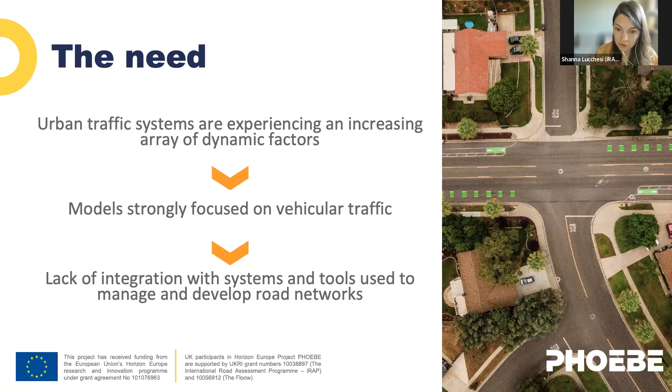So we understand that there is this lack of integration of all of these tools. Basically what we are trying to provide here is a framework that connects and enhances simulations to, again, assess the impact of interventions. But we are very ambitious with this project. We are trying to look not only at the individual level, so how users are behaving for this intervention, but at the impact network-wide, so at the macro level. And we want the framework to be able to assess the impact of new forms of transport, new technologies, or any regulatory and behavioral change. And again, with focus on vulnerable road users, not only vehicle occupants. We also aim that the PHOEBE framework will be a kind of blueprint. So we are not developing a tool properly, but it's basically a way to do these assessments. We are testing this methodology with several tools that you will see in a minute.

But the idea is here that this could be replicable with different softwares, with different methodologies. What we are trying here is really create the path on how can we do these more holistic assessments. So the project objectives, very quickly, is to develop this new replicable methodology for dynamic safety prediction and socioeconomic evaluations.

For this, we had to do some type of harmonization of safety definitions between risk assessments and traffic simulation models. We want to enhance and integrate urban risk assessment models and tools and embody the social components into risk assessment and traffic simulation, especially human behavior and mode and trip choice.

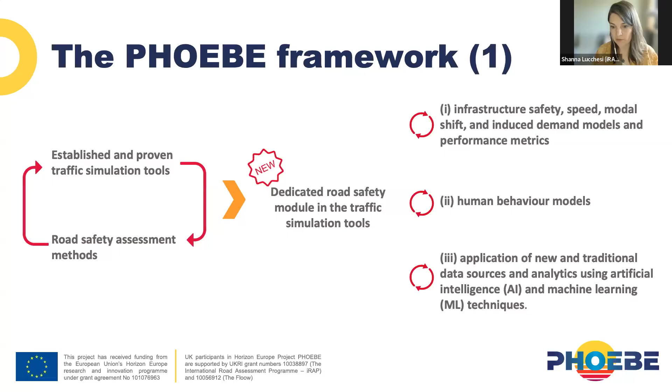So we are enhancing simulations with human behavior models that will do a more proper way of simulating behaviors inside of these tools. And also with the modal shift and induced demand model. So basically how these interventions are also changing the way that people travel and how they are inducing new travels as well. And all of this, of course, with the idea of getting new and innovative data sources, especially using AI and machine learning techniques.

So the project starts developing methodologically how the simulations can be enhanced. I know this can be quite complicated at first glance, but stay with me, I will just run you through quickly on the framework. So we start with step 1, that is basically setting the baseline scenario. So how are people traveling, behaving? How is the risk in the actual state of the network?

So basically we are combining here road safety assessment, demand models, behavior models into traffic simulations. We start with a very basic and preliminary risk assessment. But then the result of this risk assessment will be inputted into the demand models, because we understand that people will define how they travel based also on risk. So we are getting this information as a variable inside of the demand models.

In parallel, we are looking at the behavioral components. So for example, in case of speeding behavior, we are looking at what are the variables that are making people speed. My colleagues will go into more details on the demand model and behavior model later on. And then we incorporate all of these into the traffic simulations. After running the traffic simulations, the output of the simulation, especially the speed and flows, will go back to road safety assessment for a more dynamic evaluation of risk in the baseline.

And then we pretty much replicate the same thing for step 2, that is the new scenarios, with some necessary setups previously to give some insights to the demand models as well. But here in step 2, we then incorporate the changes, whether it's infrastructure changes, regulation changes, new technologies, etc. We apply that into the traffic simulation scenarios and also into the risk assessment scenarios to be able to rerun all of this in step 2.

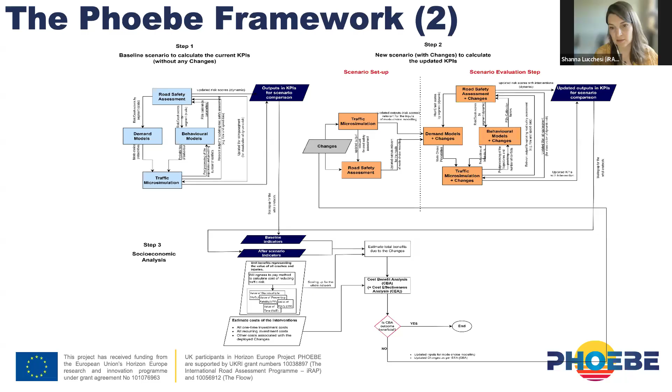Again, the whole objective is to enhance the simulation results, bringing into the simulation softwares the risk assessment, the demand models, and the behavior models. So going quickly in a little bit more detail on these 3 components that enhance the simulation.

So we start with the demand modeling and socioeconomic impact assessment. The main role here is to develop these models and have a better way of evaluating behavior and mode shift effects, and assess, of course, the socioeconomic impact of these urban mobility interventions. The integration with simulations happens through the demand models, generating future travel demand and mode shift scenarios.

Then the outputs of this, so the new OD matrix, are integrated into the Aimsun simulation environment. And here it is also important to highlight that we are doing these ODs separated per gender and age. So you'll be able to analyze the impact of the travel shift also through the social perspective. And then the simulated traffic conditions are subsequently used to estimate safety, mobility, and economic impacts.

The key contributions of all of this work are the cost-benefit analysis, the cost-effectiveness analysis, the estimation of safety, health benefits, travel time, and environmental impact, and the network-level extrapolations of these interventions.

Then for the human behavior modeling and safety-oriented simulation, again, here the idea is to develop predictive human behavior models. We aim to analyze the behavioral response to infrastructure and policy change, and model vulnerable road users' interactions and non-compliant behavior. This was quite a big innovation and a big win of the project, because one of the challenges we had when we started the PHOEBE project was the lack of information we could find regarding non-compliant behaviors for VRUs. There are a bunch of sources, especially in the big data world, for vehicle interactions, but for pedestrians and cyclists, there is still very little information you can get from those types of sources.

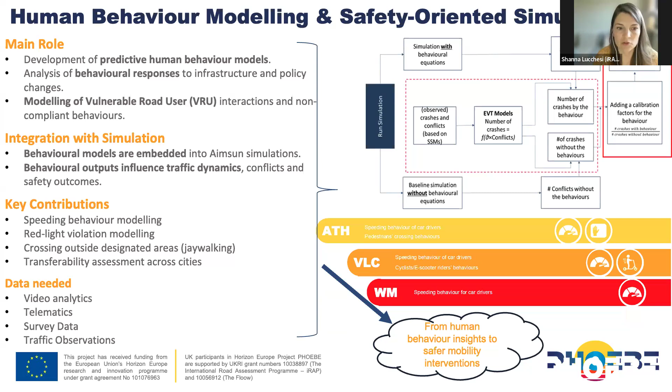So key contributions of this work are the speeding, red light, and crossing outside designated area behavior modeling, and the transferability assessment across the cities. And the data needed for all this analysis: video analytics, telematics, survey data, and traffic observations. But we're going to go a little bit more into some examples of the behavior modeling later on.

And then for the dynamic safety assessments, in Aimsun, the big thing is the simulation of future mobility scenarios. So it's still a very important tool for cities to understand the impact of interventions. So we'll be able to estimate the traffic flows, the speeds, and the interactions among users inside of the simulation software, and evaluate infrastructure and policy interventions.

In the integration with the simulations, we have the star rating scores and the fatality and severe injury estimations that by the end of the PHOEBE project are completely integrated as part of the Aimsun Next software. So someone who is doing scenario evaluations inside the simulation tools can see exactly how the scenarios impact risk on roads inside the simulation tools.

And then for the risk assessment, as part of this project we enhanced the star rating models, and iRAP later launched version 3.10 of the pedestrians and cyclists model that was developed as part of the PHOEBE project. One of the big things, as you will see a little later in the results, is that we'll be able to provide dynamic risk estimation. So it means that we can see how the risk changes through different hours of the day. And this can support a more dynamic response of cities to reduce risk for vulnerable road users.

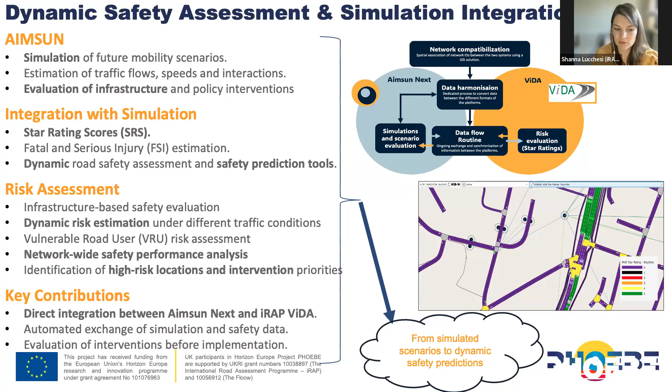And of course, this can be used for network-wide safety performance analysis and to prioritize high-risk locations and interventions. I think the key contributions I already mentioned. So there is direct integration between Aimsun Next and iRAP ViDA, which you'll hear a little bit more about later on as well. This process is now running through an API, so the data exchange and the data fetching between the two softwares are much more automated. And we can better do evaluations of interventions before implementation.

So with no further ado, I'll hand it to Stella from NTUA to guide you through the PHOEBE pilot results.

Great, thank you so much. Shanna, are you going to be the one presenting? It's up to you. If you prefer, I can present, or you can share your screen if you like. It doesn't allow me, so yes, we can go with it from you.

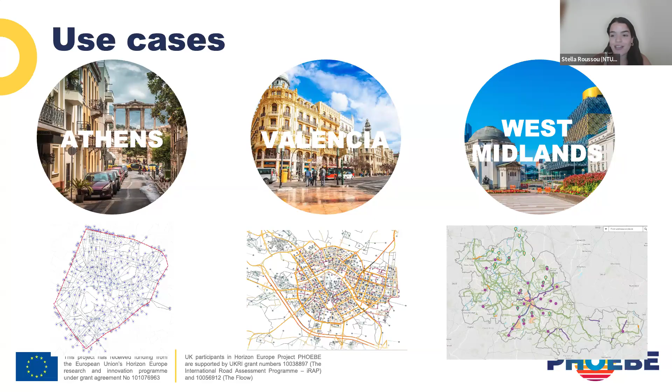Okay, hello everyone. My name is Stella Roussou. I'm a research associate and PhD candidate at the National Technical University of Athens. And today I'm going to present the three pilot use cases that were implemented in the PHOEBE project. So coming to the city of Athens, can you please move to the upcoming slides? To the next one. Great, thank you.

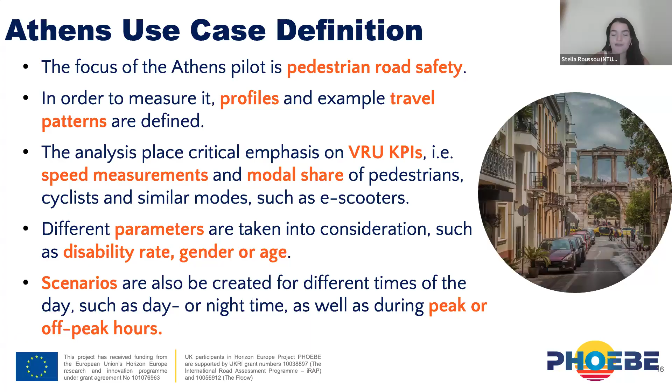So the focus of the Athens pilot was pedestrian road safety. We wanted to emphasize the VRU KPIs. So we measured the speed, the modal share of pedestrians, cyclists, and similar modes such as scooters. And the scenarios were created for different times of the day, such as the peak and the off-peak hours. And then coming to the next slide, the three major interventions that were conducted in the city of Athens.

So the first one was setting the 30-kilometer speed limit across the whole network. The second one was the establishment of bicycle routes. And the third one was the promotion of public transport, which was very crucial for the city of Athens, these three major interventions.

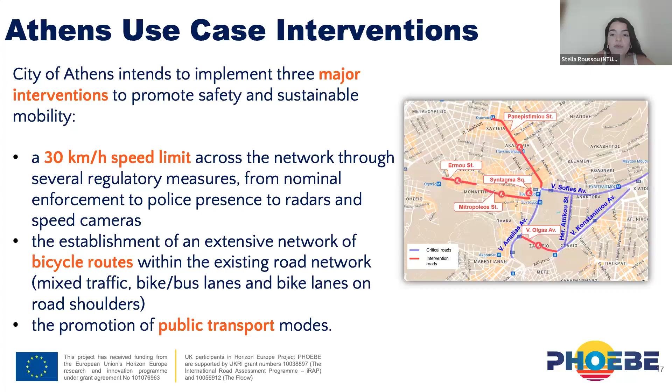Coming next to the simulation model, we conducted a before and after analysis by incorporating into the Aimsun simulation model some naturalistic observed data. The data were acquired from the Athens Traffic Management Center, and we had counts for before and after.

So from the simulation models, the outputs in the beginning were that we had an increase of trips for passenger cars and motorbikes, but a reduction for taxis. Then we had an increase in traffic flow density and unfortunately travel time and delay. And we conducted some spatial analysis by road type and control type, with primary and residential roads having a flow increase and secondary roads having an increase of crash risk.

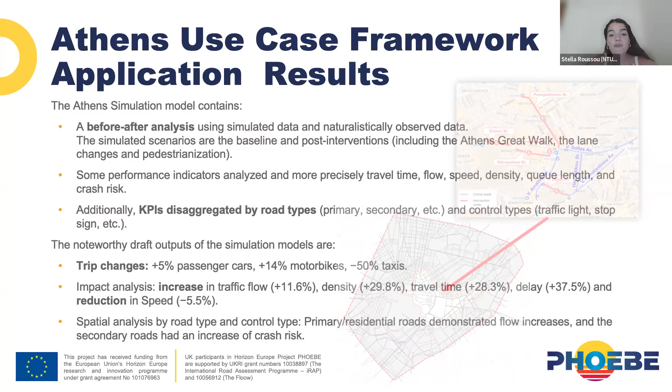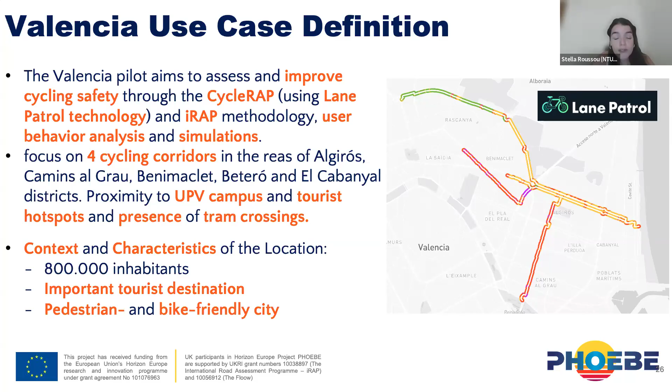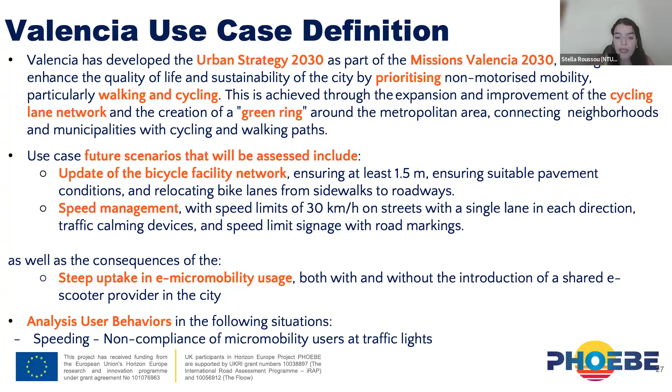The interventions in the Valencia use case were focused on 4 cycling corridors that had a proximity to the Polytechnic University of Valencia campus and tourist hotspots, and of course the presence of tram crossings. The Valencia use case had some future scenarios that will be assessed, which included the update of the bicycle facility network and speed management, as a consequence of the steep uptake in e-micromobility usage. For the Valencia use case, we had to analyze user behavior in situations of speeding and the non-compliance of micromobility users at traffic lights.

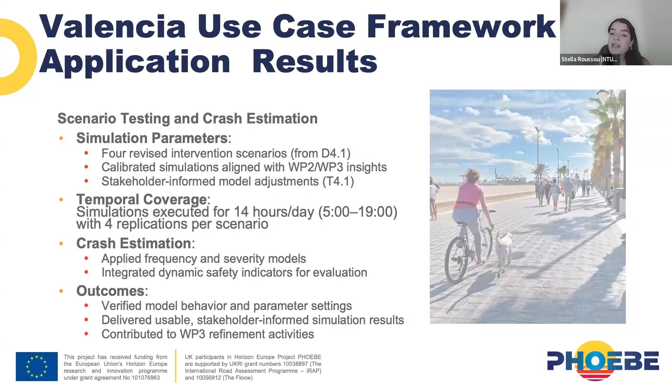So for the first intervention, we had moving the bike lane from sidewalks to the roadway with physical separation. For the next intervention, we had to establish a variable speed limit that downgraded motor lanes and adjusted bike paths to 30 kilometers per hour. The third one was to model a 30% increase in micromobility, evaluating the impact of private versus public shared scooter systems.

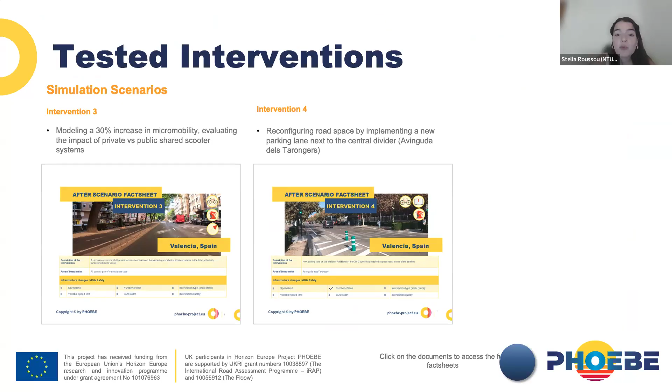And the fourth one was to reconfigure the road space by implementing a new parking lane next to the central divider. As for the Valencia local stakeholders, they also implemented 2 reflection meetings. What was very fruitful from their discussions was that the Valencia use case results, the iRAP and more precisely the CycleRAP results, were in line with expectations. There was a positive reaction to the improvements of the AI-based image recognition in infrastructure assessment, and a discussion on how the PHOEBE framework can fit within the existing Valencia traffic management system.

And now coming to the last use case, the West Midlands. This use case focused on behavioral change and cycling road safety. We had two model simulations that covered an area within the West Midlands. The first one covered 50 square kilometers from Birmingham city centre to Solihull, and the second one covered 5 square kilometers to the south of Birmingham city centre. The interventions were reduced speed limits from 40 miles per hour to 30 miles per hour, and the implication of mode shift induced by new cycle infrastructure.

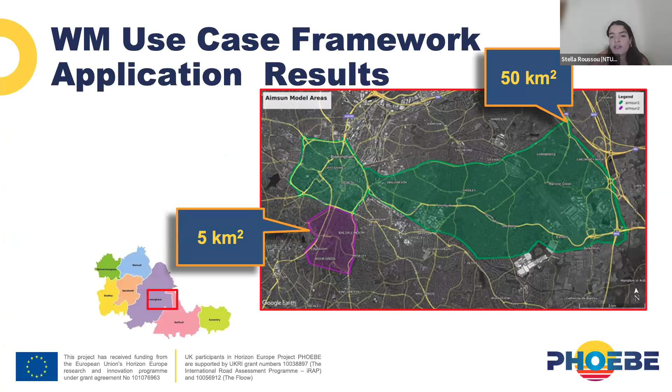On the next slide, we can see the area that was simulated, in Birmingham and the more generic area of the West Midlands. Coming to the definitions of the West Midlands use case, extensive simulations were used to forecast changes in traffic behavior and road risk. There was an assessment of the safety of cycling infrastructure using Lane Patrol. We used surveys to understand public opinions regarding the speed limit, which was very important for the stakeholders, and to predict the changes in mode shift towards active travel and public transport.

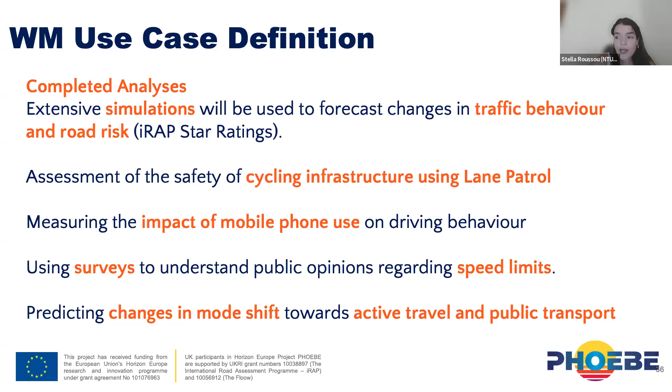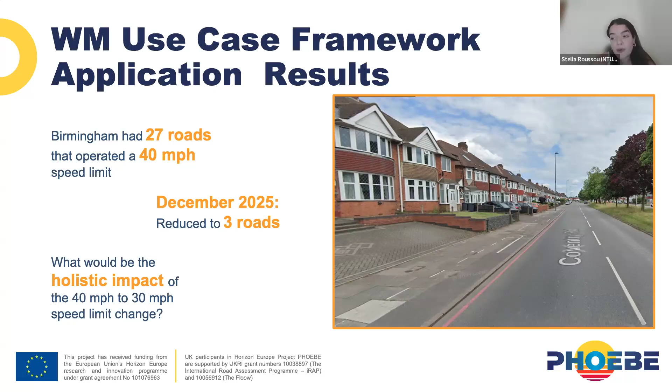So the Birmingham area had 27 roads operating at 40 miles per hour, but then it was reduced to 3 roads. So the question was, what will be the holistic impact of the 40 miles per hour to 30 miles per hour speed limit change? Coming to the iRAP results, the iRAP model predicted that a reduction in the speed limit from 40 to 30 miles per hour will result in a 36% reduction in FSI, and there were very big improvements to the safety of cyclists and pedestrians.

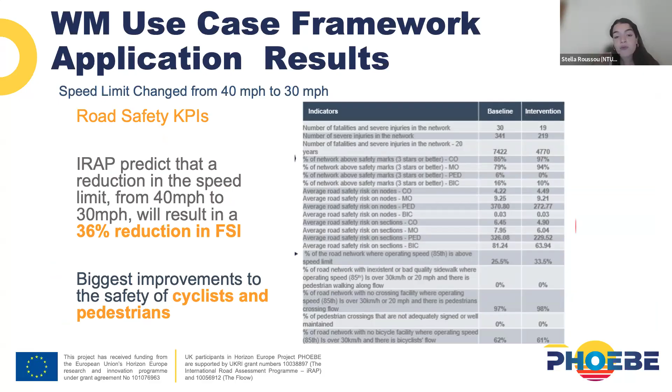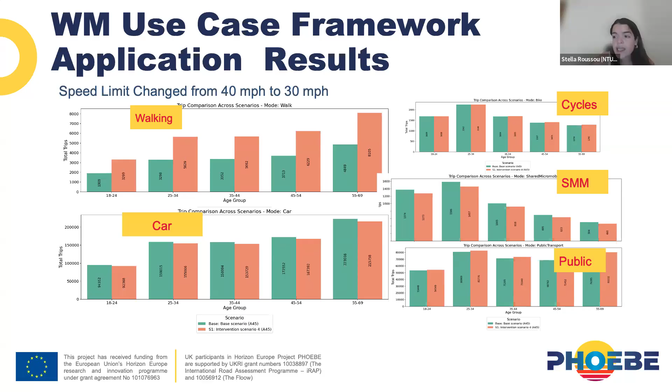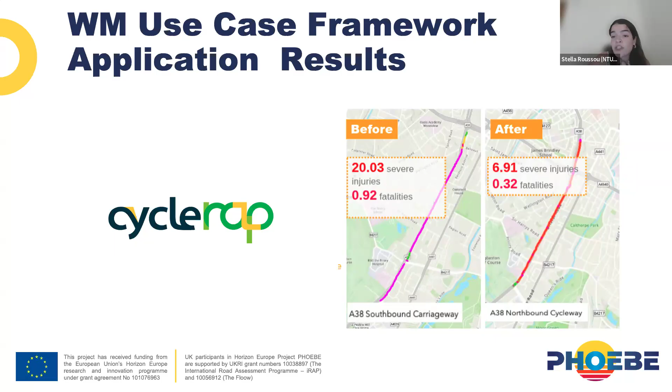From the next results, we can see that there was an increase in the total number of walking trips, a slight increase in the number of cycling trips, and a small reduction in total car trips, which was very important for the West Midlands use case. Now, understanding the safety impact of the new cycle infrastructure, coming to the CycleRAP results on the next slide, the before results had 20 severe injuries, but after, we had very big reductions to 6.91 severe injuries, and likewise for the fatalities.

So overall, several local authorities were in attendance at all the stakeholder reflection workshops through all the use cases, and the local authorities acknowledged the benefits and highlighted the great difficulty faced by transport planners, particularly when those changes inhibit or restrict the movement of motorized vehicles.

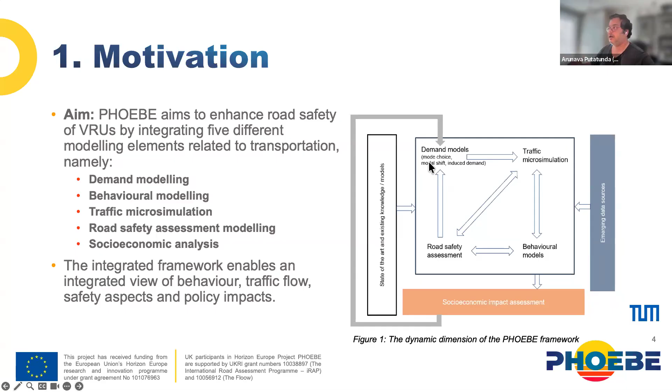So as we all know by now, the project PHOEBE acts as an integration framework for 5 different modeling components. The first one is demand modeling, followed by behavioral, traffic microsimulation, road safety assessment modeling, and socioeconomic analysis. Of course, socioeconomic analysis is not a modeling component, but still, it is a separate component that can be identified as a modeling component. So here you can see on the right how these things are integrated with each other, and this is quite a big view of the overall framework.

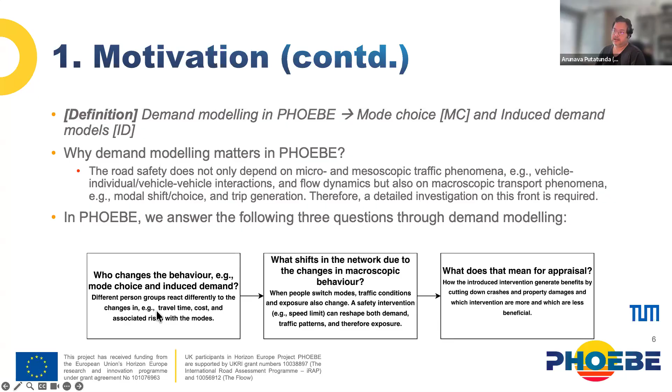Say for example, due to the change of travel time, cost, associated risks, etc. So this is our first question. The second question is, once the people change their behavior, what shifts into the network due to the change in macroscopic behavior? That is, when people switch to another mode, traffic conditions and exposures also change. So a safety intervention can actually reshape both the demands as well as traffic patterns and therefore the exposure.

So we actually answer these 2 questions. So this is where the integration of demand model takes place. And finally, the answer of these 2 questions feeds the third question, what does that mean for appraisal? And that is the third part, which is the socioeconomic analysis part.

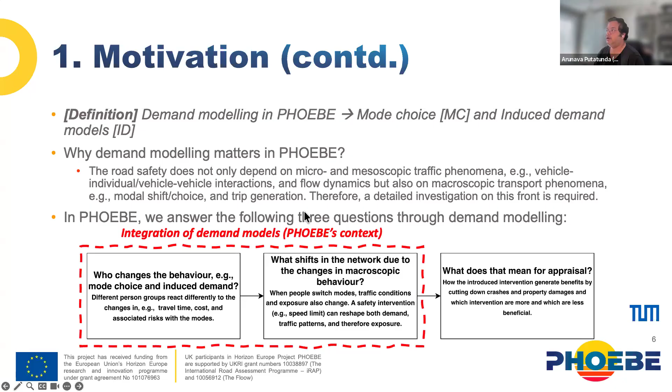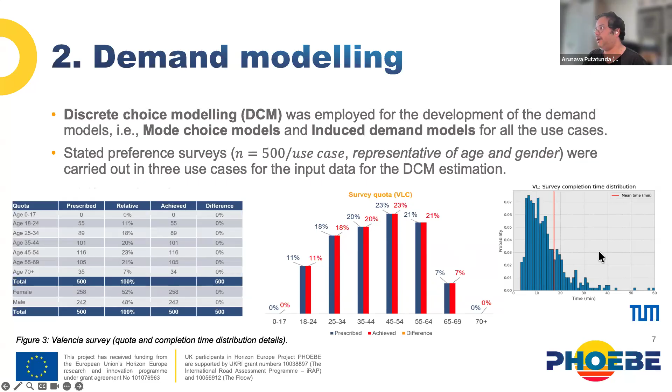So in demand modeling, we estimated the models, then we calibrated the models, and then we tested the models. It was really a common practice that we followed in this particular project. We used our survey inputs to estimate the models, and we used R as well as the Apollo package to estimate the models. These are parsimonious multinomial logit models. Then we calibrated the model using 2024 data, which fixed the model to the baseline 2024.

And here you can see the explanatory variables for the mode choice, which were travel cost, in-vehicle time, wait and egress time, travel distance, and associated risks relative to the reference mode, which was public transport, since public transport came out to be the safest among all the other modes in all these use cases.

Then our induced demand models were estimated to forecast or calculate the extra trips due to the changes in these explanatory variables. And these induced demand models were only developed for shared micromobility. As explanatory variables, we have delta travel time, or the difference in in-vehicle time, travel cost, and other stuff as well that you can see over here.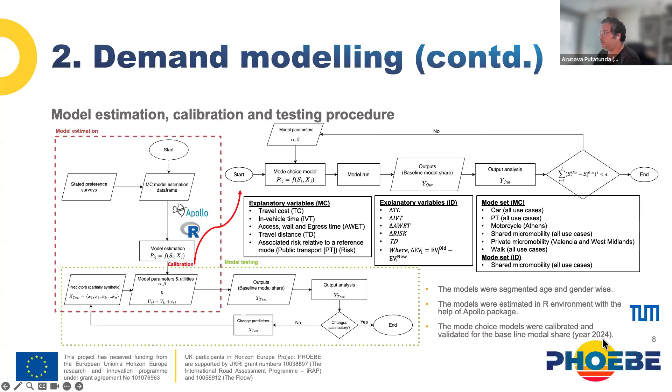So the models, as I have already described, we segmented according to the age and the gender of the particular use case. And then we used year 2024 data to calibrate and validate the baseline model.

So now talking a bit about the integration. The question is how these two models integrate with the big framework that we have already seen. The mode choice models integrate typically with two other modeling components: the traffic microsimulation model through the OD matrices interface, and the road safety assessment model through the associated risk metrics, which are used as explanatory variables in our mode choice as well as induced demand model.

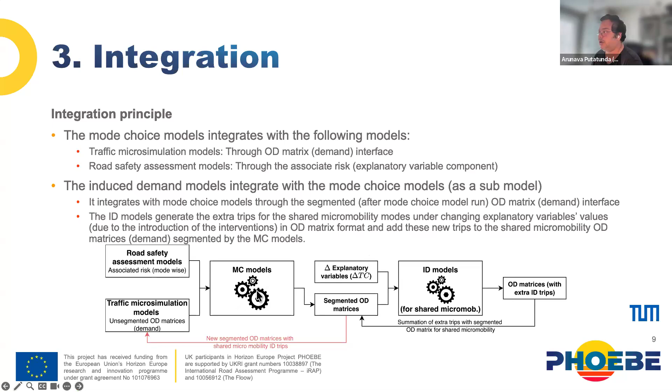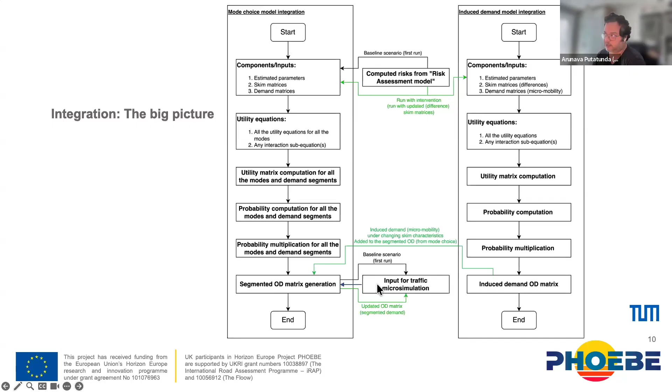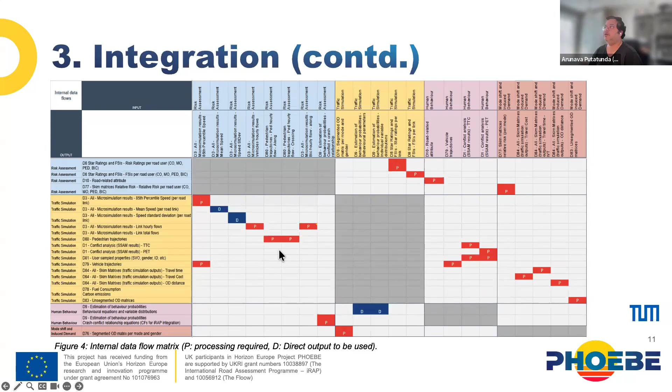So having said that, we also had to face a few challenges while integrating the stuff, because we were dealing with macroscopic models and microscopic models together, and we needed to integrate them. So this was a big issue, because mode choice as well as induced demand are macroscopic models, and traffic microsimulation is a microscopic model. Then we had to see through how we can integrate and

preserve the consistency. On top of that, we also had a few consistency issues like scenario definition, zoning, mode labels, etc., that we had to solve during this integration. Further, we also had some data requirements as well as interoperability between these models that we had to take care of in order to make this framework functional.

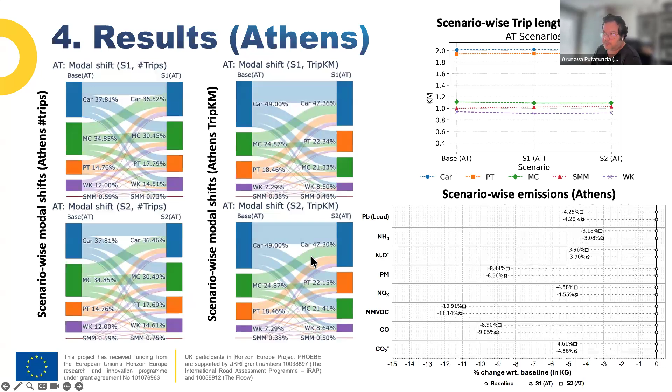So having said that, thank you from my side. This was all about demand modeling.

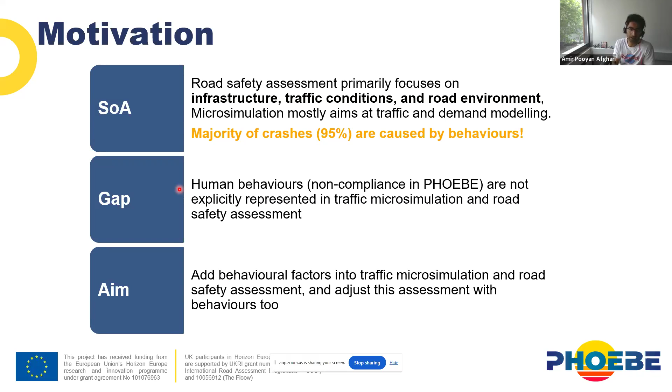We are aware that human behavior is a broad term. It can indicate many different elements of the behavioral aspects of humans. However, there is a niche focus within the scope of this project, and the focus is really on the non-compliance behaviors, human factors type of behaviors in PHOEBE. And so the objective was to add behavioral factors, these non-compliant behaviors, into traffic microsimulation and road safety assessment, and finally to adjust the road safety assessment with these non-compliant behaviors.

To do so, we developed a methodology which basically consisted of three main elements, starting with understanding road users' behavior, or these non-compliant behaviors, and then integrated them into traffic microsimulation, and then scaling it up into more macroscopic road safety assessment.

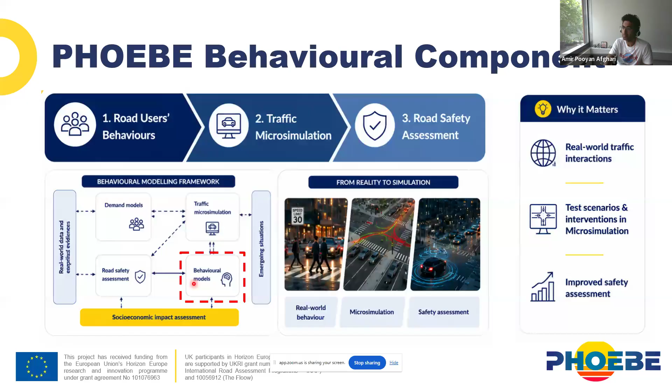Again, I want to also present a very simplified version of the process of this methodology. So we started by learning human behaviors from real world data. I'm going to walk you through the data in a second. But then we first started by developing some discrete choice models of certain behaviors. The discrete choice models would provide us with probabilities of the behaviors. And then we integrated those probabilities into traffic microsimulation.

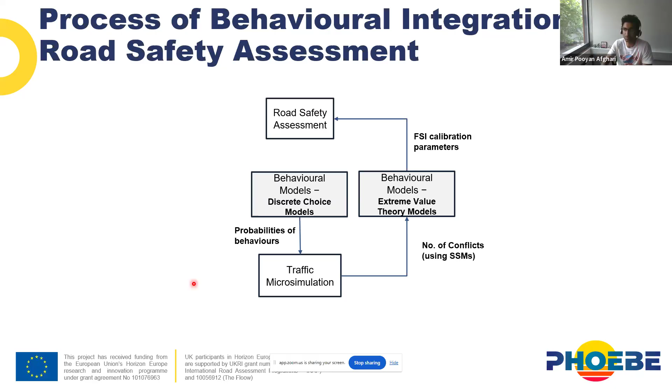Then out of traffic microsimulation, we extracted the total number of conflicts using surrogate safety measures with the behaviors applied. And then we would apply different types of behavioral models, well, specifically extreme value theory models, to develop a relationship between traffic conflicts and crashes. And out of that, we developed FSI calibration factors, and then we gave those factors to road safety assessment to basically adjust the methodologies of road safety assessment with the behaviors.

Now, starting with the first phase of the methodology, indeed, we wanted to, again, learn from the instances of specific road user behaviors. We also integrated many different other types of inputs, including road geometry, traffic composition, also individual characteristics, demographics, past behaviors, psychosocial attributes of people, and out of all of those factors, we developed discrete choice models for certain behaviors, which is basically providing us the probability of the behavior as a function of all of those inputs.

Then out of the discrete choice models, we get the individual behavioral probabilities. However, again, based on probability theory, these individual probabilities can also be translated into proportions. So for example, a 5% probability of going over the speed limit basically would mean that out of 100 vehicles passing through a section, 5 of them would go over the speed limit. So we translated these individual probabilities into the proportions of the behaviors, and then we integrate that into traffic microsimulation, and then we run the simulations at the end of this phase.

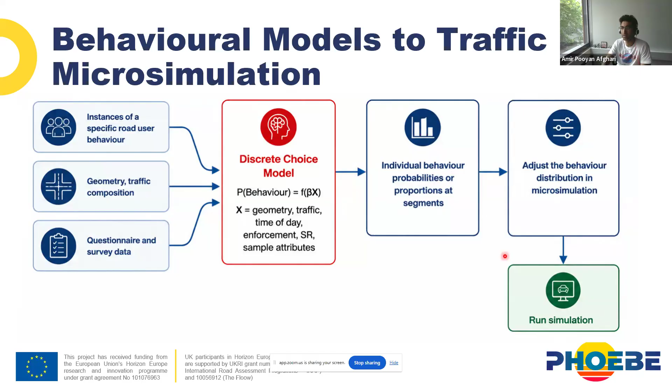So speeding, going over the speed limit, was one of the specific behaviors that we tested on. We integrated that behavior through the Aimsun Next API by modifying the speed acceptance parameter of the microsimulation. Also, because we had a lot of inputs from network characteristics, so roadway geometry and roadway conditions, the network transitions, so when there is a transition from a part of the network to another part of the network, triggered activation or deactivation of the speeding behavior.

And the behavior is activated based on the behavioral probability and a random draw. So basically, we gave a probability out of the discrete choice models to traffic microsimulation. Traffic microsimulation generated a random draw. If it was less than the probability that we would give the traffic microsimulation, then the speeding behavior was operated, otherwise not. And so here's a screenshot of the microsimulation. And if I'm not wrong, I believe the red dots are basically the places where there is speeding behavior in the network.

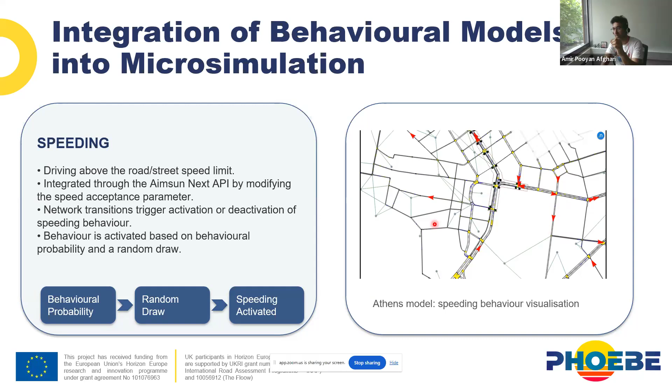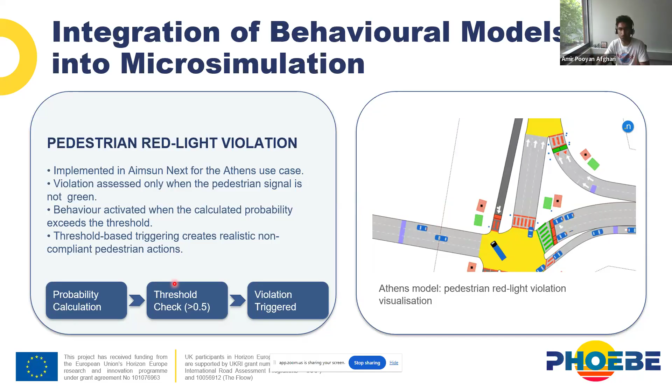The other behavior that we tested on was the pedestrian red light violation. So when there is a red light for pedestrians and pedestrians run the red light. Again, we implemented that in Aimsun Next for the Athens use case only. The violation was assessed only when the pedestrian signal was not green, so it was red. The behavior was activated when the calculated probability exceeded the threshold. And the threshold, we chose 50%. So if the probability was more than 50%, then the pedestrians were allowed to basically cross the road even when it was red.

Now in the second phase, after the behavior is integrated into traffic microsimulation, we have to basically scale it up into macroscopic road safety assessment. The challenge was that the output of traffic microsimulation is microscopic, as the name implies. So AIMSUN, or traffic microsimulation, would provide us with conflicts, whereas iRAP, the road safety assessment, is based on crashes. All the crash modification factors and the star rating scores are based on crashes. However, from the output of traffic microsimulation, we have conflicts. So we had to create a link between conflicts and crashes.

To address this challenge, this is the methodology that we developed. I'm just going to walk you through the overall methodology very quickly. Basically, we run the simulations with the behavioral equations, discrete choice models, and extracted the conflicts with the behavior. On the bottom side, we also run the simulations without behavioral equations, and extracted conflicts without the behaviors. So on the one hand, we have the conflicts with the behaviors. On the other hand, we have the conflicts without the behaviors.

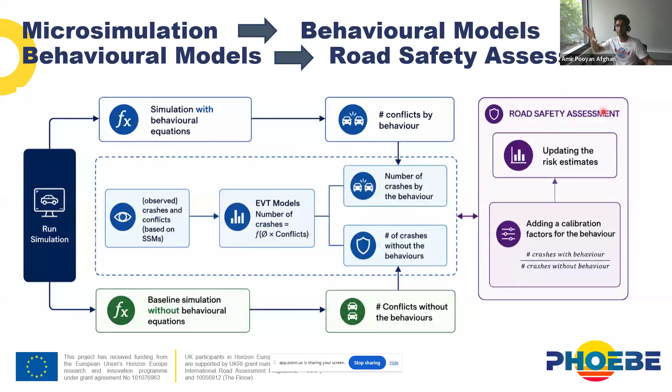In parallel, using actual video data, we developed crash-conflict relationships using extreme value theory models. So at the end, we would have an empirical relationship between conflicts and crashes. Feeding the conflicts both with and without the behaviors into this relationship, we would get the number of crashes with behaviors and the number of crashes without behaviors. We took the ratio of the two, and we developed a modification factor for road safety assessment. This is the way that we scale it up from microscopic to macroscopic road safety assessment.

In terms of the implementation, again, we had 3 use cases. We implemented the speeding behavior, going over the speed limit for car drivers, in all 3 use cases. In the Athens use case, we also had non-compliant behaviors of pedestrians, so red light violation of pedestrians. And in the Valencia use case, we had non-compliant behaviors of micromobility, so red light running of cyclists and e-scooters.

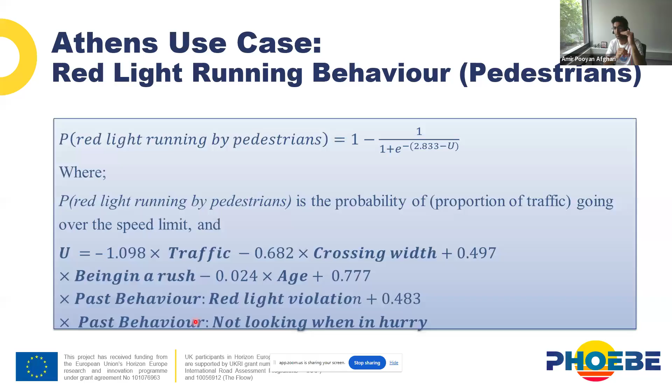Due to the lack of time, I want to only focus on the results for the Athens use case. In Athens, this is the estimated discrete choice model for the red light running behaviors. We get the probability of red light running by pedestrians, which depends on the traffic being high or low, the crossing width of the road, being in a rush or not, the age of the pedestrian, and the past behaviors of the pedestrian. So whether the pedestrians did a red light running violation before, whether they were in a hurry and not looking, and so on. These are just a few factors out of a long list that we tested, and the only ones that were statistically significant for the sample in Athens.

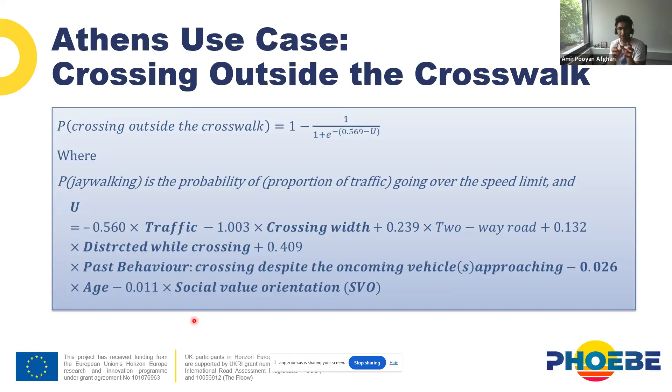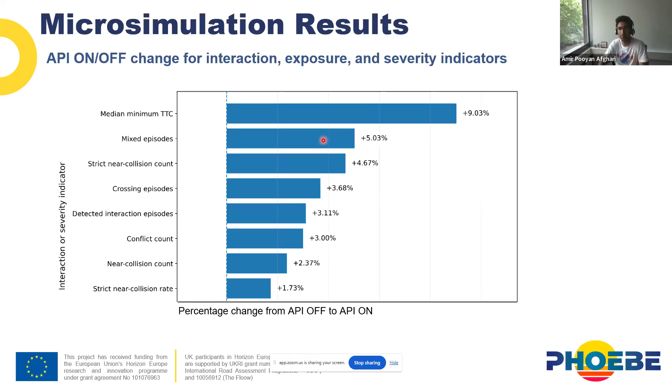This is another one, the probability of crossing outside of the designated area, kind of jaywalking in Athens, again depending on an array of factors coming from traffic characteristics, roadway geometry, but also individual attributes of pedestrians. And finally, these are the results after integration. These are the percentage changes from when the behavioral API is off to when it is on in the traffic microsimulation. When the behaviors are integrated, the median of the minimum TTC was increased by about 9%, and many other indicators also increased by substantial percentages, which shows that when actual human behaviors are implemented, there are more risky outcomes in traffic microsimulation.

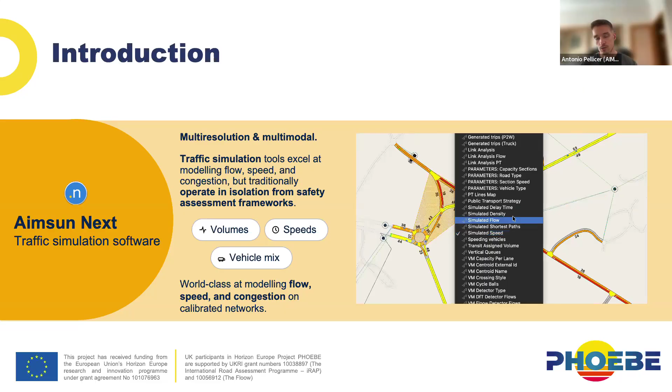Then on the other side, we have iRAP ViDA. This is iRAP's platform for road safety data management and risk assessment. ViDA delivers the internationally recognized star ratings and is used by governments worldwide. Basically it rates the different road sections from 1 to 5 stars, 1 star being the highest risk and 5 stars the lowest risk.

However, the limitation is that ViDA relies on manually entered static inputs from road infrastructure, which are quite disconnected from real-life operational inputs. So in this project, we aim to incorporate the operational outputs from the simulation into the safety assessments and vice versa. So we have two best-in-class tools, Aimsun Next and iRAP ViDA, but working in silos. The integration of these two components closes the gap, so now practitioners can evaluate mobility and safety together in a single iterative workflow.

And talking about workflows, this is what we have proposed in the project. Basically, it consists of 3 main steps. The first one involves the network compatibility issues. We need to make sure that there is a spatial association of network IDs between both networks, so the road sections in Aimsun Next need to have an associated road section in the ViDA platform.

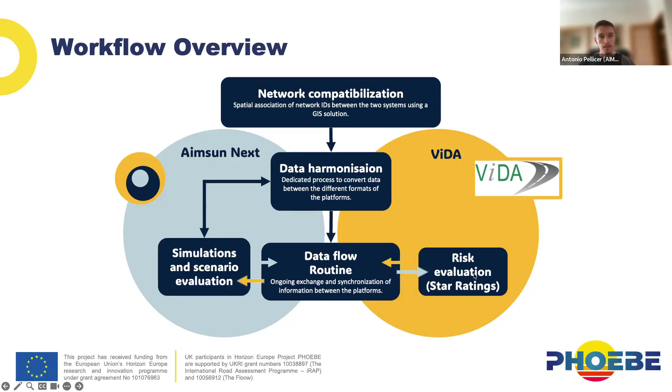The second step involves data harmonization. We need to create a process that converts the data into the different formats so it can be read by the different platforms. And finally, we have the data flow routine, which is responsible for exchanging the information between the platforms. For the sake of time, I will not cover the network compatibility issues, and instead we will focus on how this information is harmonized and exchanged between both platforms.

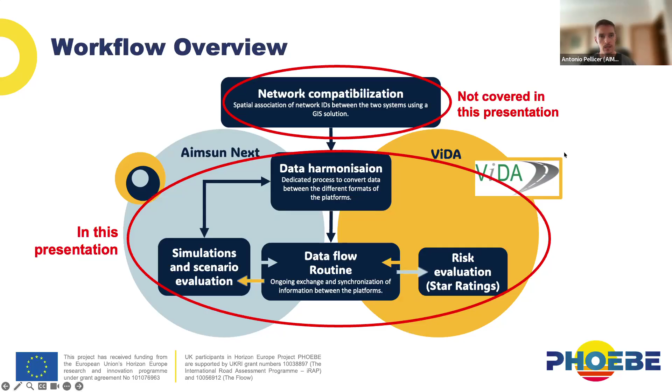So the key idea here is to have an integration layer for bidirectional data exchange, done in two phases. In phase one, traffic simulation results, such as volumes, speeds, and vehicle compositions, are sent to the safety assessment platform for the recalculation of the star ratings based on operational variables from the simulation. Then in phase two, once these updated star ratings are recalculated, they are sent back to the simulator in order to be visualized within the user interface of the simulation software.

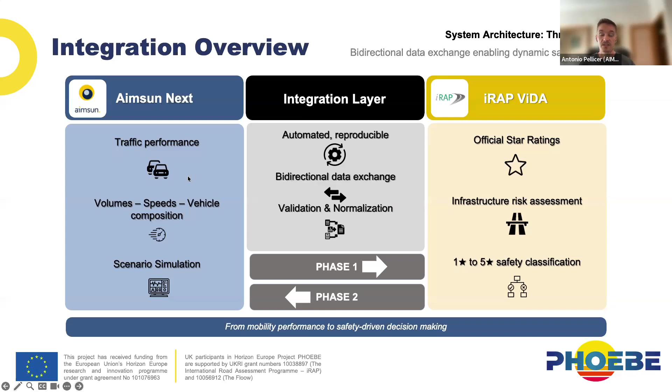Now, this diagram shows the integration architecture in a little more detail. Phase one goes from Aimsun to iRAP ViDA. We are extracting the outputs from the simulation. Then we build a CSV file with all the information from the simulation, as well as the existing iRAP ViDA infrastructure data. Once we have both files combined, we upload this new information into the ViDA platform so they can recalculate the new star ratings.

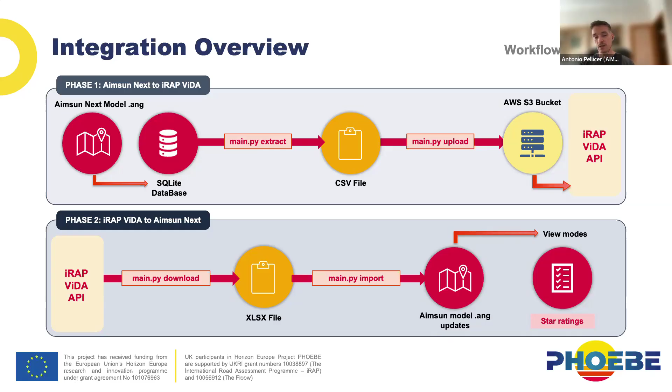In phase two, once the star ratings are recalculated, we just need to download this information, import it into the simulation, and also create the view modes to visualize it within the user interface. In the following slides, we will go step by step through the integration process, and at the same time apply each step to a case study, in this case the Birmingham case study in the West Midlands, within the PHOEBE project. So, going into phase one.

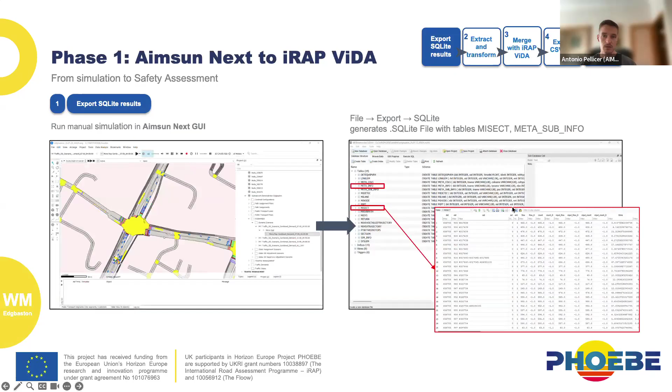So as we said, the first step is to run the simulation and then extract the different tables containing different operational variables, such as traffic volumes and speeds. Then once we have this information, so all the results, we then need to download the existing infrastructure data from iRAP. And we need to merge both data sets in order to have a complete CSV file with all the information, so this can be sent to the ViDA platform.

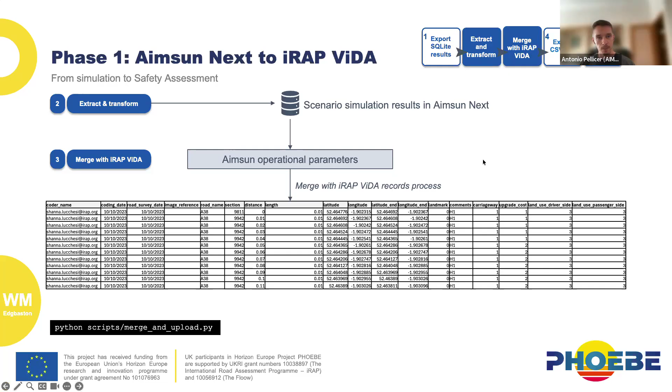Within this CSV file, as I mentioned, we are combining both things. So first of all, we are having the existing data from the infrastructure. So it can contain, for example, road geometry, different intersection types, different road conditions that normally are not part of a simulation. And these values are not overwritten. These are per se the values that we take from iRAP.

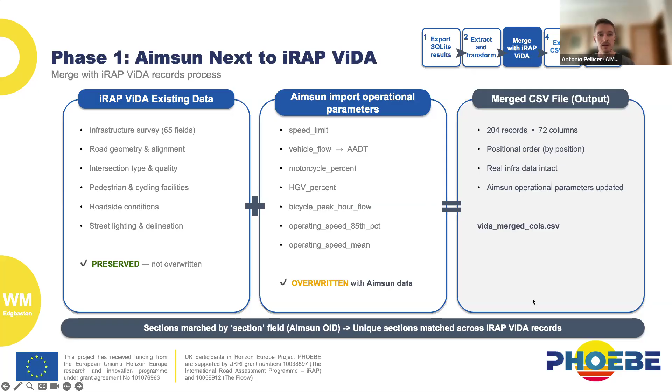And then we are adding the operational parameters, such as the speed limits, vehicle flow, which is converted to the annual average daily traffic, and different vehicle composition. So these values, together with the existing values, create this complete CSV file. And finally, this information is sent to ViDA using the ViDA API. And then once ViDA receives all the updated information, they recalculate and update the star ratings based on the operational parameters from the simulation.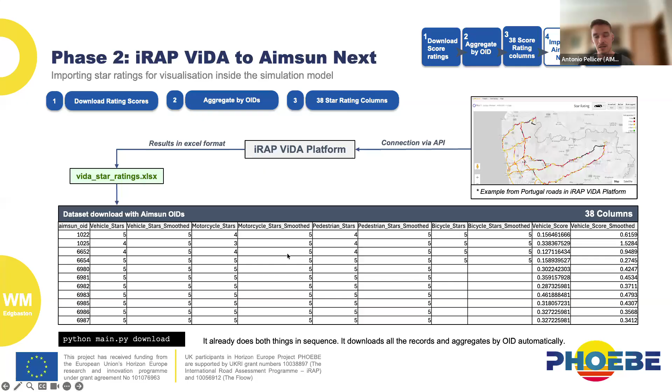Once we have this done, then we need to import this information to the Aimsun Next software, which in this case we have done by adding different columns into the different road sections, so we can add this information. And finally, we can build the different view modes, so we can visualize this information in the user interface.

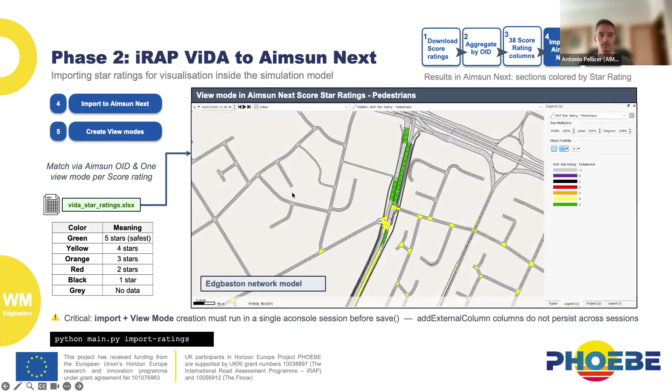So just to conclude this presentation, as I mentioned, this is a bidirectional automated data exchange in phase 1 and phase 2. We are using the iRAP data, and we are just updating seven, let's say, variables. We are not overwriting the rest of the iRAP infrastructure data. Of course, this pipeline can be run for any simulation scenario. The only condition, of course, is to have network compatibility between both networks.

We have identified also some limitations, which basically means we need to enhance the full automation of this process, because at the moment both phases are automated, but the calculation of the star ratings needs to be enhanced for the automation of the full process. And within the future work, we also would like to have live operational systems. So instead of simulation data, we will get real-time data, so we can enhance this as a live operational system, and then transfer that to the simulation in order to have more like a digital twin with the safety parameters also included.

I have the task then to unpack a little bit the results of a three-year project. So there's a lot of things to mention. Bear with me for an additional 10 minutes, and then we open again for some questions.

So for results here, we are talking about two key groups. One that I'm calling technical results, but it's more the project results, the things that the project can offer. And the other type of results is the policy side. So what are the learnings from the use cases, from the application of all of this work in real use case scenarios? And these learnings will be presented through the PHOEBE framework key performance indicators. So in terms of the technical results, the main one for us is the framework.

I know that you saw the framework with the different structures later on, but I want to present this one here just to show you how we really operationalize all of this that you just heard from my colleagues today. So after we developed the methodological framework, we had to put it into operation. Put it into operation means to establish this timeline, establishing the data flows, which are the external data sources, but also the internal data sources, how one model can really feed into the other,

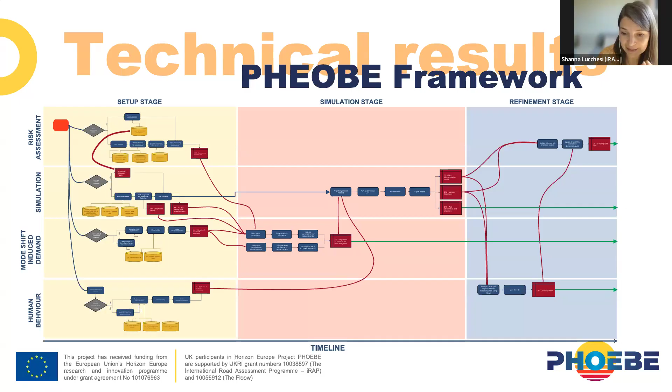If this seems a lot, and also replying a little bit to the question that was in the Q&A, there is also the possibility of using the PHOEBE framework in a type of modular approach. So ideally, of course, it would be nice to integrate all of the 4 components, because then you can really see the holistic impact of the interventions in terms of safety that we want to have at the end.

But if data is not available, if the cities don't have the proper knowledge or the right people to conduct some particular parts of the framework, you can always plug one or more of these components into traffic simulation, and already some enhancements will be possible. So we are looking at this from a perspective that currently cities are only looking at a small piece of the pie.

So we want to add some additional things to really provide a good trade-off between safety and the other operational, environmental, or social indicators that they could be assessing when testing interventions. So please bear in mind that although this might seem complex from what we are presenting, you can always take a simpler approach, and already some benefits will derive from this modular approach.

So the other outputs or results that the project brought to the bigger audience is the Star Ratings new model version. If you follow iRAP, you might have seen that we just launched version 3.10. With version 3.10, we have enhancements on risk assessment for pedestrians and bicyclists, more specifically, including new crash types for cyclists, and also updates on the risk factors based on evidence and research that we conducted as part of

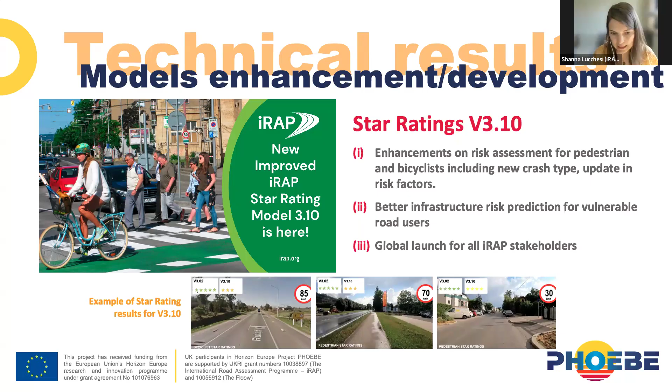the PHOEBE project. So we now have better infrastructure risk prediction for these vulnerable road users, and this is globally launched for all iRAP stakeholders, and V3.10 is now the new standard version of the model that any iRAP assessments should follow.

You just heard Antonio talking a little bit about the Aimsun safety module. So you saw in detail how the Star Ratings are now integrated into Aimsun Next. This is already available for those of you that want to do this type of analysis, but there is also the development of the APIs that incorporate the human behavior model and the mode shift and induced demand outputs inside the traffic simulation. So now we have a much more powerful software in terms of assessing these human and travel behaviors in cities.

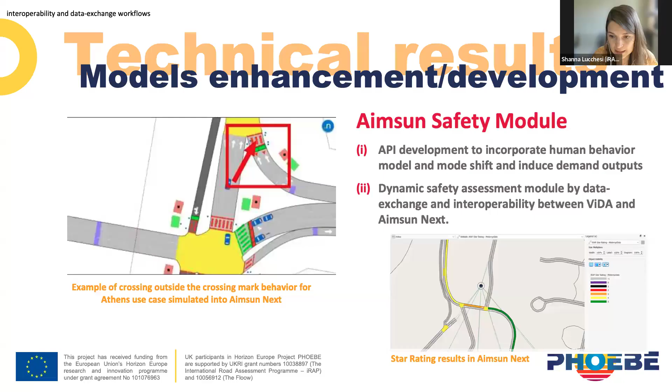I mentioned at the beginning that we want PHOEBE to be a type of blueprint of how this assessment should be done. We have this blueprint now. In deliverable 5.2, available on the PHOEBE website, we have what we call the framework protocols. In the framework protocols, we describe in a lot of detail how the framework operates, the necessary developments for each component, how the integration happens, the data flows, and how you calculate the performance indicators.

And we have one interesting piece of work here that we call the PHOEBE required skills and knowledge. There we have listed everything that you need to know to replicate the PHOEBE framework. Here, of course, we are not, for example, teaching how to estimate mode choice models, but we are saying, okay, if you want to do this piece of the framework, you need to have someone that has the proper knowledge to estimate these models.

In terms of PHOEBE publications, we have different types of publications that were produced as part of the project. Of course, there are the deliverables that present all of the technical work, and they are available on the PHOEBE website. There is also a lot of scientific knowledge produced, already published or in process to be published. So here I have two examples of academic papers derived directly from the PHOEBE outputs. And also quite interesting gray literature that we have produced together with other projects focused on road safety. So PHOEBE is part of what we call the road safety cluster project.

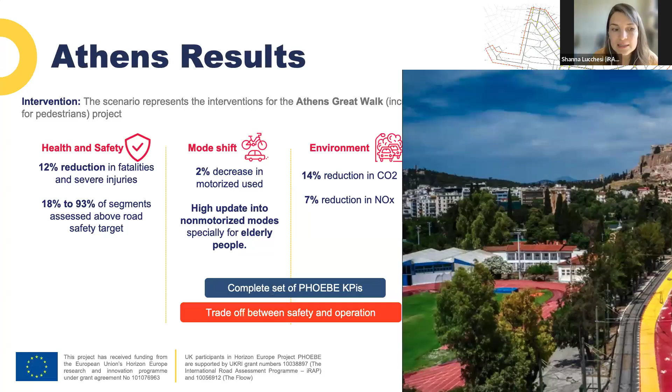So going to Athens first, just for us to have an overview of everything. Again, if you remember what Stella explained, the Great Walk project in Athens is working to create more space for pedestrians and cyclists, including pedestrianization of one of their main streets. And there was another scenario with the speed limit reduction. But if we only look at the Great Walk intervention, this is basically what we get as results. In terms of the health and safety indicators, we see a 12% reduction in fatalities and severe injuries. And you will see that there was an increase in segments assessed above road safety targets.

So the road safety target here, we are talking about 3 stars or better. In the baseline, we have 18% of the network with segments classified with at least 3 stars. With the interventions, we move this to 93%. So it's already a very impactful safety result. In terms of mode shift, there is a 2% decrease in motorized use. As Arunava also mentioned, these numbers are quite small because the network is very small. But we see overall high uptake of non-motorized modes, especially for elderly people. In terms of environment, we see reductions in CO2 and NOx emissions.

In operations, we see 70% reduction in travel time and 13% reduction in travel distance. There are more KPIs available. I just got some key ones in here, but for you to have a look of how broad we got in terms of information that cities can look to really evaluate the impact of this intervention.

So the idea here is that it will be possible to do trade-offs between safety and operation, between environment and operation, between environment and safety, and etc. So one example of this is the speed limit reduction scenarios. So here we are looking for Athens and West Midlands. In case of Athens, again, it was a reduction of 50 kilometers per hour to 30 kilometers per hour in

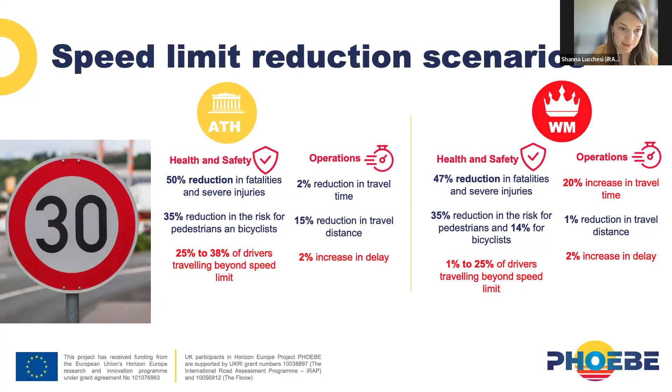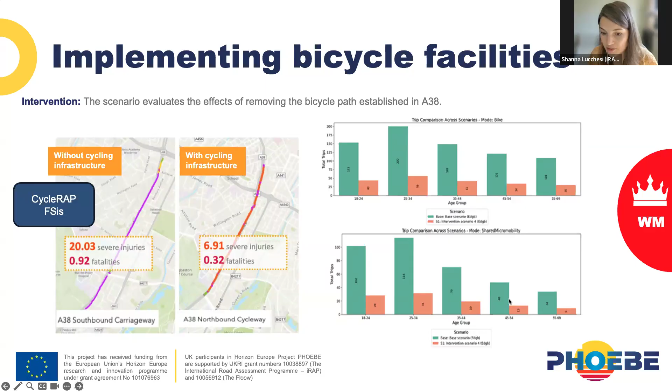And this is quite an interesting thing for cities to move to even more innovative solutions, because then they could, for example, understand that if in one of the hours I see the risk getting too high because the speed is getting high, then I can plan, for example, speed enforcement interventions only for those particular hours.

Or I can see, for example, if for some particular hours the risk is too high for cyclists, I can create some type of dynamic allocation of space and create segregated bicycle infrastructure only for those hours where the risk is high.

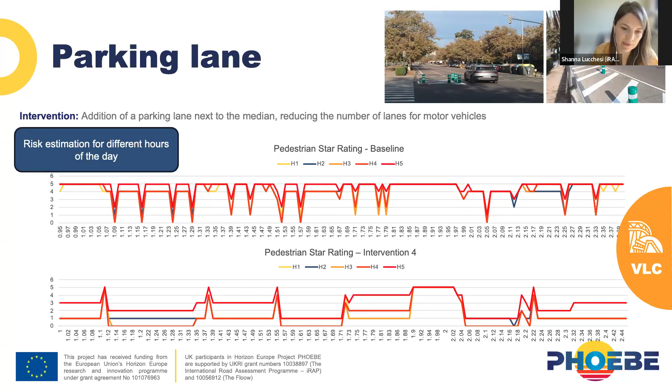So just very briefly on the overall results, I think we have 3 use cases that can really inspire other cities on what to do to improve safety. So in the case of Athens, the reclaiming of the public space and the reduction of the speed limits really exemplify how these regulatory measures can complement infrastructure change to reduce risk of vulnerable road users.

In the case of Valencia, I just presented this intervention, but there were two other very innovative interventions tested. For example, one where we tested the safety impact of reducing the speed limit of different lanes. So basically, the lanes more to the right are going to have smaller speed limits than the one to the left. So you can see the results of these testing scenarios also in the PHOEBE deliverables.

And in the case of West Midlands as well, this idea of taking just the results of the testing of reducing speed limits in some key corridors, how can we really scale this up to the whole network of West Midlands? So we tested that as part of PHOEBE. So please get in contact with our deliverables and materials where you'll be able to see more on PHOEBE results and policy insights. This is what I have for now.